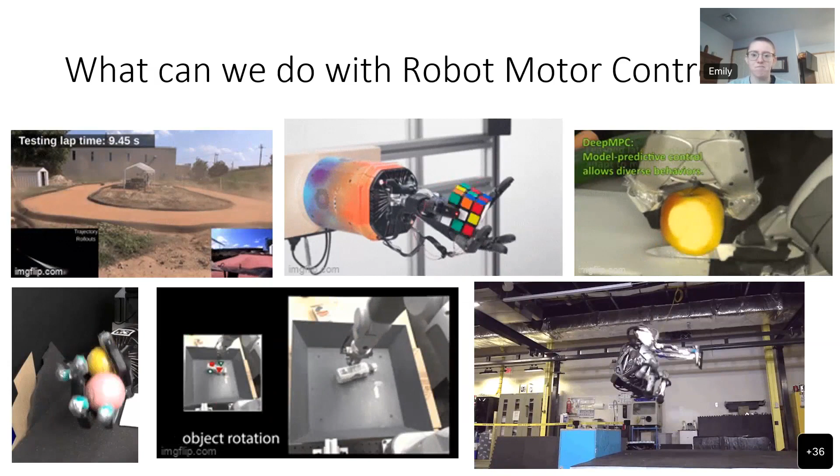So today I'm going to be talking about the work that I've done over the past 6 years doing my PhD, and the general theme of everything I've worked on is the creation and use of forward models in robot motor control. So what is robot motor control? I mean, it's basically anything that you want to do with a robot. How do you make a robot do a specific task?

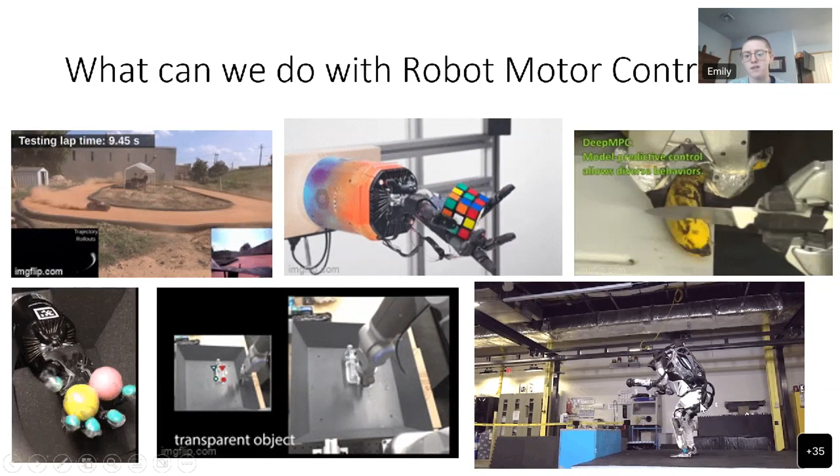That can be from dexterous manipulation using a robot hand to solve a Rubik's Cube. It can be more generalized locomotion movement, like the Atlas doing a backflip. But basically, any kind of robot motor control is you have a robot and you have some kind of goal. And what we want to do is come up with a sequence of actions that help us perform a task or reach this goal. So let's say we have this robot arm, we want to pick an apple.

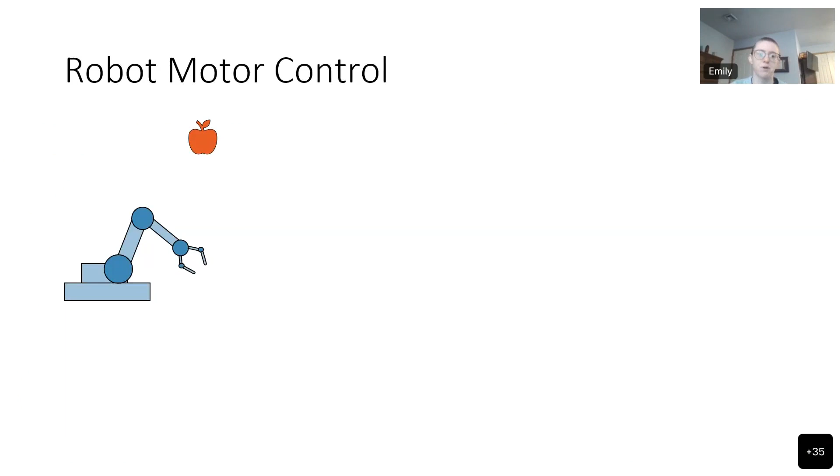We need to find an action that will move us closer to our final goal, with the hope of finally reaching it in the end. This sounds simple, but it's a very complicated problem, and it is currently an open topic of research.

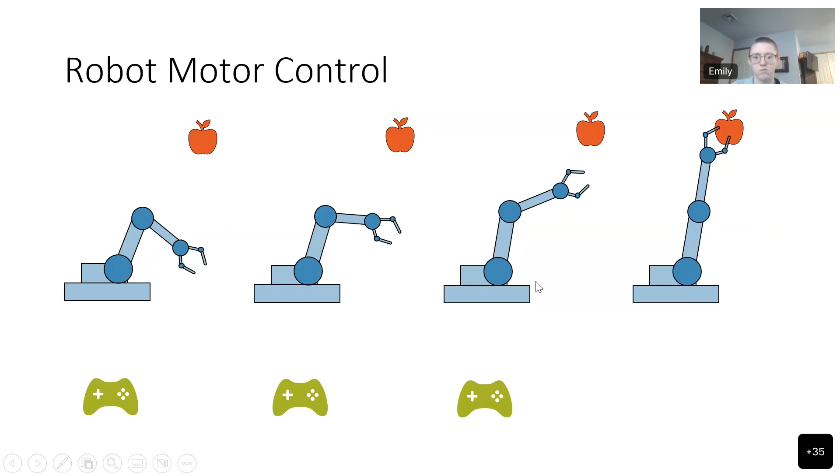Okay, so there's three major categories or modes of attack to achieve robot motor control. The first is the more traditional optimal control, which includes model predictive control, such as iterative linear quadratic regulators. More recently, there's been a lot of work in model-based reinforcement learning as well as model-free reinforcement learning, and these are often done in simulation, but they're slowly moving into the real world.

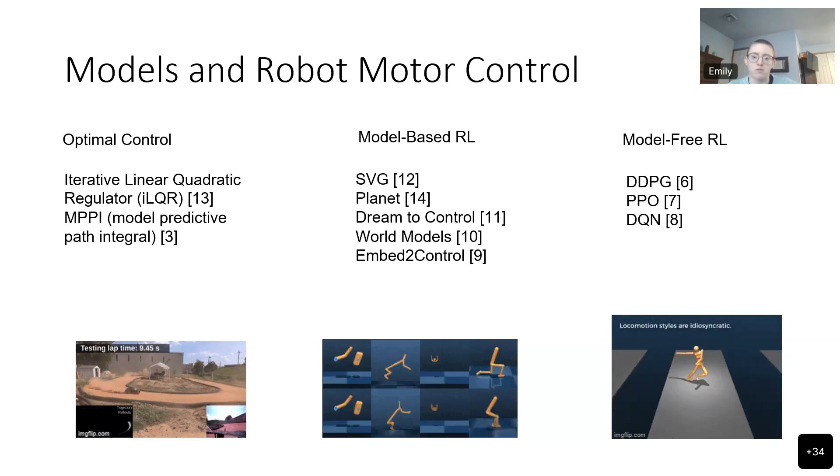But one of the main areas of research that is still lacking is the actual development of the models for these systems. So optimal control requires a model, model-based RL requires a model, and we're also going to argue in a minute how model-free RL also benefits from a model. And that is the basis of a lot of my research, is that in order to develop advanced methods of robot motor control, we first need to develop models for these controllers to use.

So a model is any function, simulator, algorithm that takes the current state of your system, which would be the robot and the surrounding environment, and it takes an action and it predicts what's going to happen to the robot and the environment when that action is taken. This is useful for all three methods.

So optimal control is one of the oldest types of control that we have and is very robust. You have a real robot, you take its current state, and your controller tests a bunch of different trajectories. So we've got a set of green actions, a set of yellow actions, and a set of red actions. It uses its internal model, which may not be perfect, to approximate what's going to happen if we take this action or the sequence of actions.

The controller chooses the option that gets us closest to our goal. It then takes the action on the real robot, and then we read that new state and then perform it again. So it's a controller that runs in real time, and it uses a model as imagination

to do its best to think of actions that it can take without having to actually take them, which saves a lot of time and also can prevent catastrophic errors. If it knows that the action is going to result in going too fast or hitting an obstacle, it can choose not to take that action.

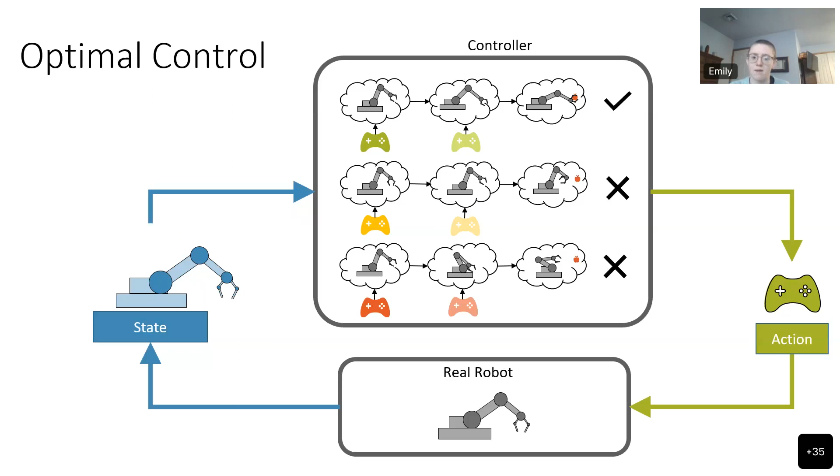Model-based RL, or reinforcement learning, is essentially building off of optimal control. It performs the same task, and it has a model, but generally this model is learned, and as we take actions and observe our resulting states, we keep track of that data, and we can use that to update our model in real time in order to make it more accurate for the specific environment that we're in, or to even just learn a model from scratch by exploring.

Finally, we have model-free RL, which you may ask, if it says model-free, how are we going to argue that it needs a model? Model-free RL is great in that we learn a policy, which is the same as a controller, by taking actions. It starts off randomly, and then you maybe have different heuristics for how to choose actions, but it performs those actions on the real robot in the real world, and it's very sample inefficient.

So we may need to take millions of actions on a robot in order to learn a single task, such as picking up an object. If you want to learn a new task, you have to repeat that again, and it's generally not feasible to train a policy in the real world because it's too expensive and takes too much time.

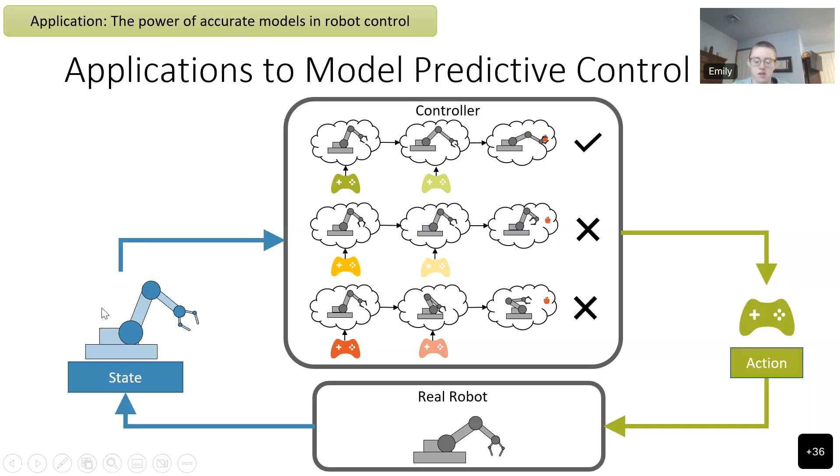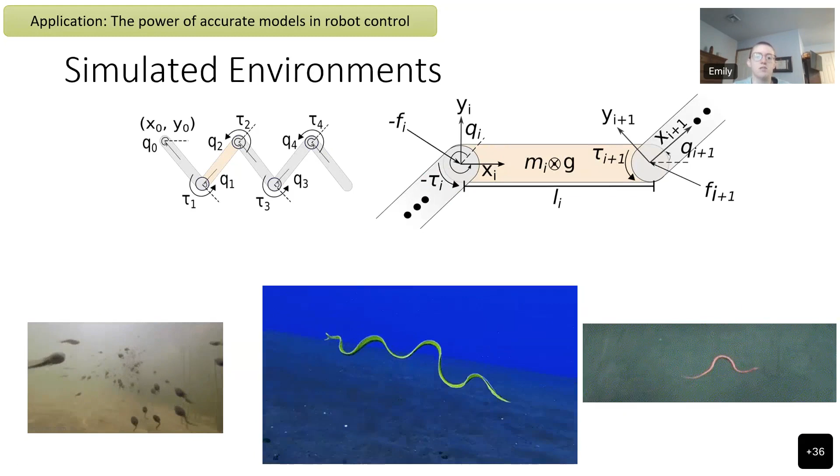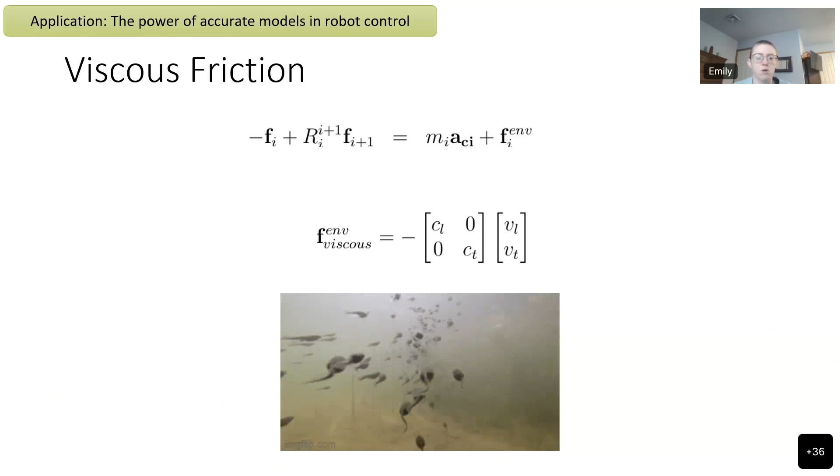In this research, we used a simulated snake and we tested how well model predictive control worked when our model simulated different environments for a snake. So we simulated a snake on the ground using dry friction. We simulated a snake, or more like a tadpole, with viscous friction, which really only applies to very small fish or tadpoles. And then we also tested changing our model to include fluid dynamics and added mass, which would be more like an eel.

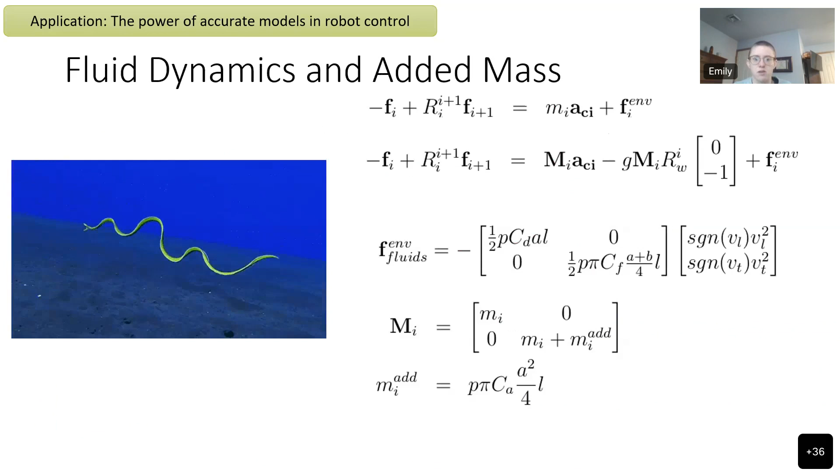Our results were that no matter how much our model changed to show different environments, model predictive control was able to generate gaits that seemed to match what you would expect in the real world for dry friction, viscous friction, and fluid dynamics. So this shows that if we can learn models that are accurate, or even models that can change for changing environments, model predictive control is very powerful.

The alternative method to using model predictive control would be to use a PID controller using an analytical snake gait generator. And when we tested that, we found that every time we changed the model, we had to change a lot of parameters in order to optimize and get a gait that worked again. Using model predictive control, as long as the model was there and made physical sense, the controller was able to adapt the motion in order to achieve forward locomotion in that environment. So once we start learning models, we can start placing them in a model predictive control setting and see how they perform.

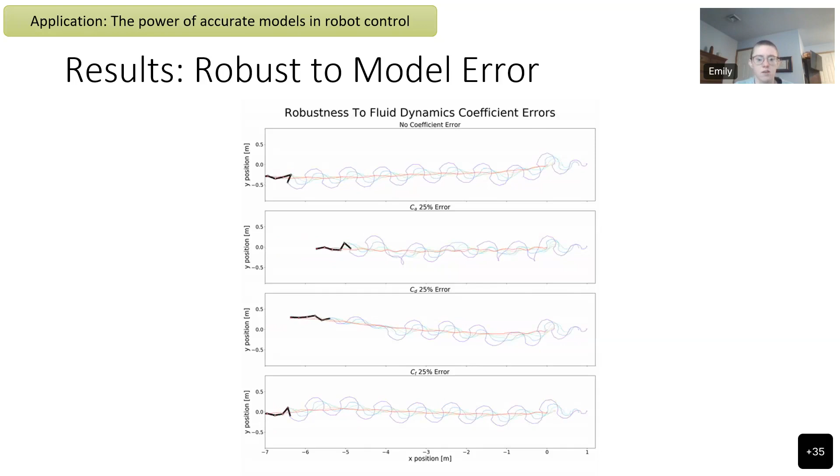The other benefit is that as long as models are fairly accurate, they do not have to be perfect. Model predictive control is able to adapt and still generate locomotion with model errors. So some of the models we learned earlier that were in the latent space, if there's a few outliers, I think model predictive control will be okay, as long as we can generally keep our models in a fairly accurate range. With error even up to 25% on some of the coefficients of friction, the controller is able to handle it. So these are very visually pleasing results, and it shows the power of models in general.

And this was the first work we did at the beginning of my research, and after doing this, we realized how important models were, and that's kind of where the rest of the work was derived from. And so future work would be taking a lot of the models that we learned, or learning a model for the snake and not just the pendulum, and testing them in environments like this.

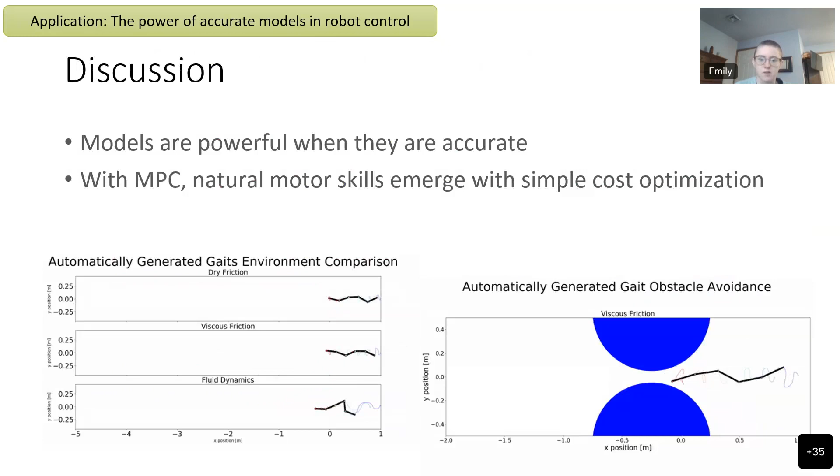So in conclusion, the two main contributions of this work are that we were able to improve the long-term accuracy of learned forward models by simply adding temporal data, or increasing the number of time steps that we put into the loss function. This seems like a pretty simple result, but it's also very powerful because we weren't using something like an LSTM. This is just using a single model and predicting multiple steps and using that as our loss function. It's something that any learned model can encode. You can easily implement this, so it's a very simple way to improve any model. So we hope it can be applied to any kind of robotic system.

The second is that with our method of learning a lower dimensional latent space using context training, we were able to improve the long-term accuracy of our learned forward models that operate in the latent space, by using context training to learn the encoder and the decoder. The general result is that, let's start with the single step architecture. The results I showed were for the 2-link.

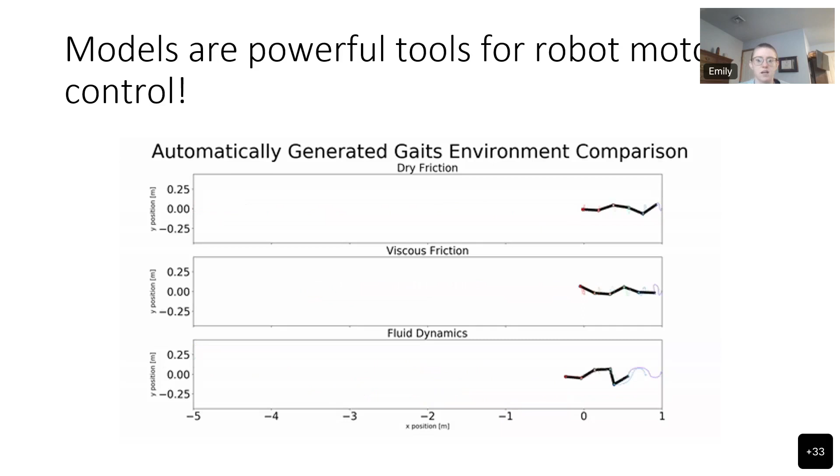Thank you, Emily. That was a great talk. I have a few questions. In the interest of time, I'm jumping in here. So I don't know if you're familiar with the work from Chelsea Finn from Google Brain on hierarchical foresight. A lot of what you're talking about reminded me of some of the work we've read from Chelsea Finn. If you're not familiar, it might be a good read for you. Yeah. Okay. I think in their context they use something called sub goals, but it's really to predict these long horizon tasks in RL. I see. So it might be a good reference if you're not familiar with that work.

Thank you. The question I have for your work is how much performance improvement did you get with using these AE models? You have used different variations with the context, but what is the performance improvement you received? I know there was one slide which you went through. Yes. So over the horizon, yeah.